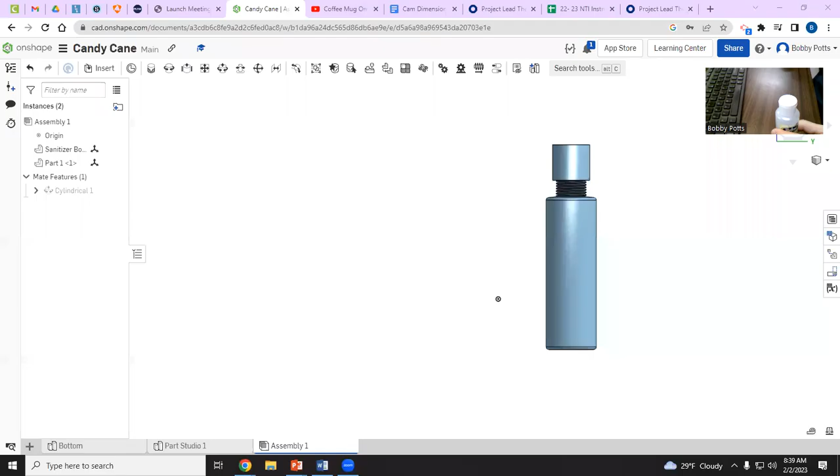But I'm going to create the bottle, top two pieces, and I need to do it somewhat quick because I've got to be under 15 minutes. So essentially, this is what we're going to make. This right here, slightly at the top here. Let me stop. Okay, slightly up, and then the bottom of it. You have a bit of a concave there, which you can't really see.

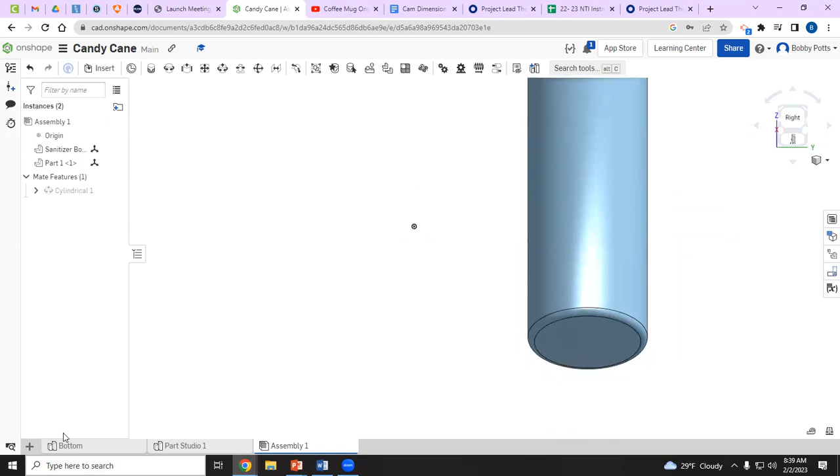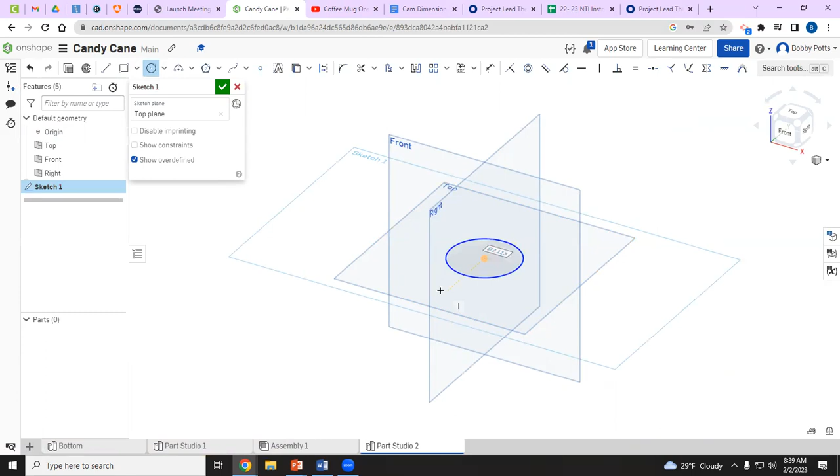So, to do this, once you try it on your own, need the video, use the video, but try and add those features, get it roughly in the correct dimension. But I'm going to create a part studio, sketch the bottom, and I'm going to start with just my cylinder. I'm going to make it 1 inch. Okay, let's extrude it. We'll make it 3 inches tall.

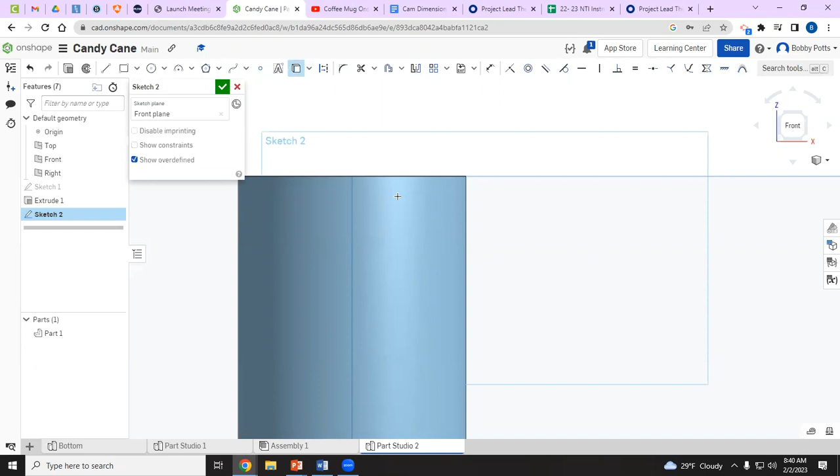Now, an important part, adding this concave, we're just going to sketch a triangle on this plane. All right, so front plane. I need to make sure I hit the use project to convert. Right now, that's the circle around the top. I want it to become a line across that plane. So project that line onto that plane.

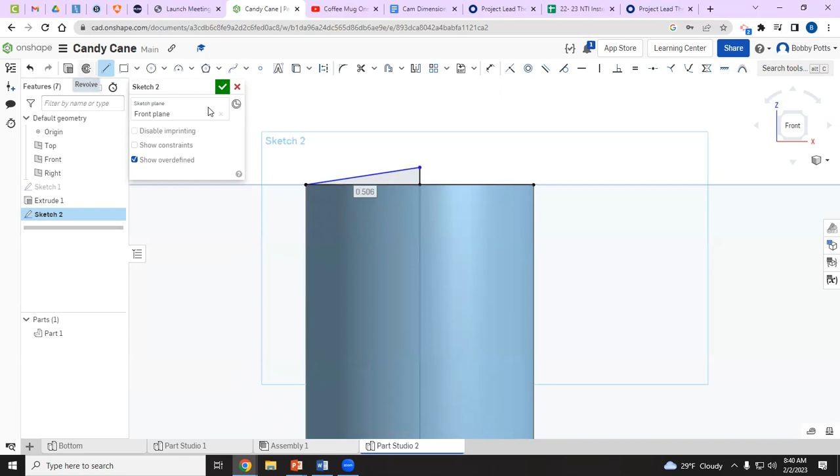All right, and now I can just build my triangle. I don't care a whole lot about dimensions. I just want to make sure I get the correct shape. Now it's filled in, so I know I can do my revolve, that triangle, that axis, and there we go. Okay, then we're gonna do kind of the same thing on the bottom.

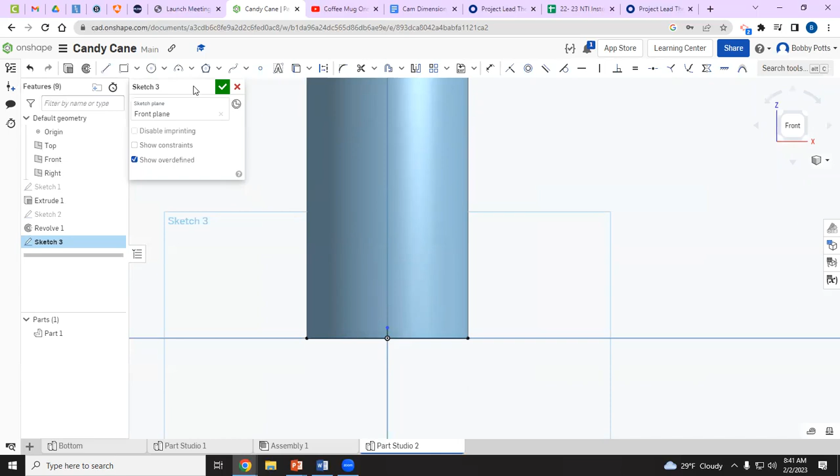So sketch, I still want the right plane or front plane. Convert that to the line. I'm gonna go up a little bit, and this time I'm gonna make it an arc from there to there, right about like that. Okay, revolve that face, axis right there, and we want to make sure we remove.

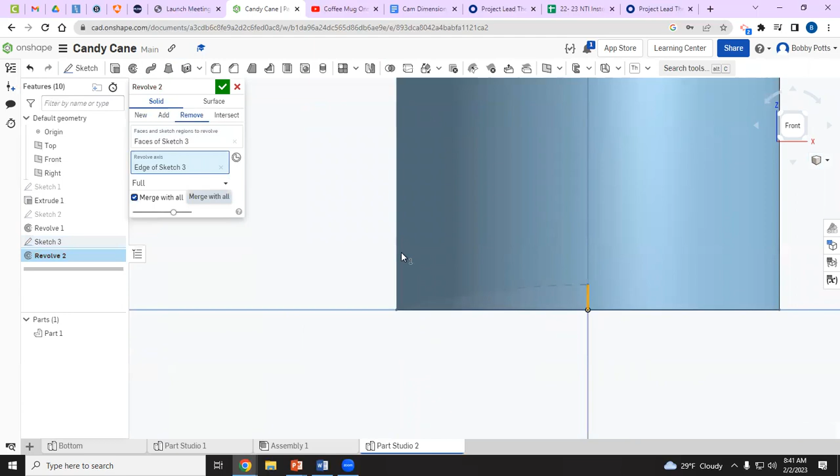Okay, if we remove, you can kind of see it there that it's cut out. Not that big a deal. All right, and then the last thing I want to do is a fillet, kind of soften up that edge and that edge. Mine set at 0.05. Looks pretty good to me.

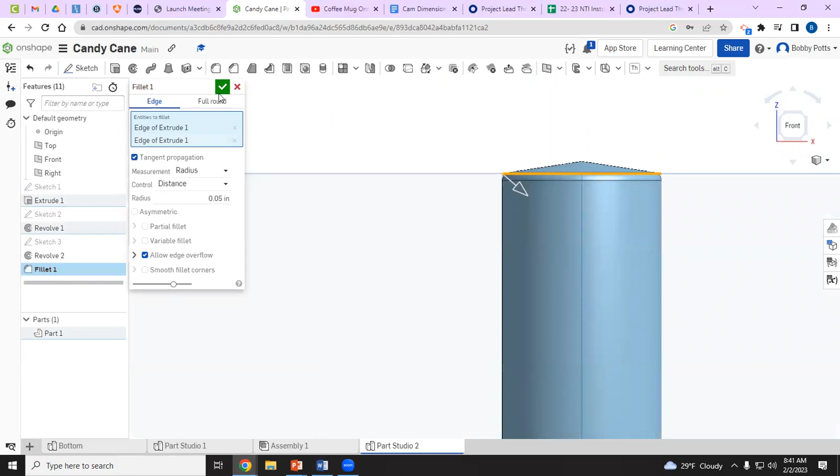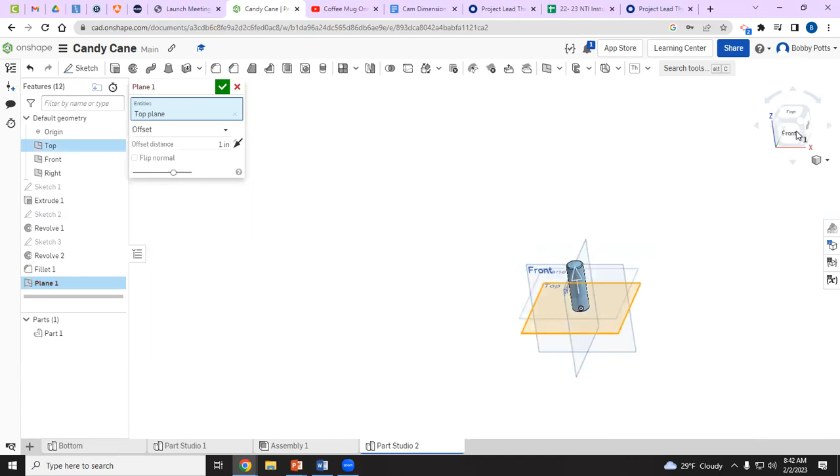Okay, now the cap part. We need that cylinder right there for it to screw onto. So I'm going to first do an offset plane. I want that top plane, and I want it to come up to here. We set that at 3 inches. So I'm going to offset it to 3 inches. So now that plane is right through here, which is where I want it. Isometric view, so I'm going to build on this plane.

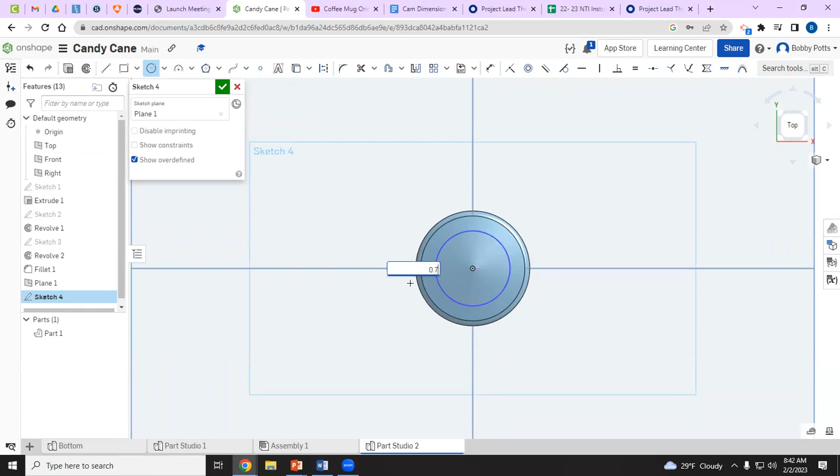So sketch that plane. I'm going to make a circle from my center. And right there, I'm at, let's go 0.7. Okay, extrude, sketch 4. Let's go up a 1/2 inch.

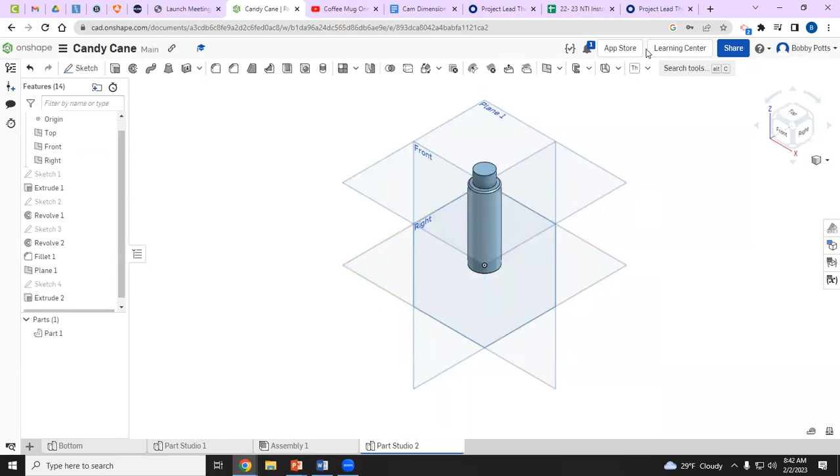So you should have your thread creator. If it's not there, hit add custom features, search thread creator. That's hopefully there. If not, click that one, and then it should pop up here. So we want our thread creator. I want it to go around this edge right here.

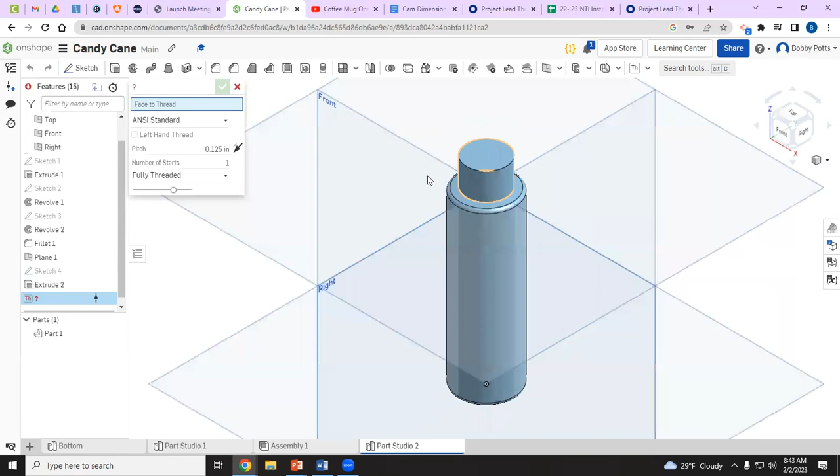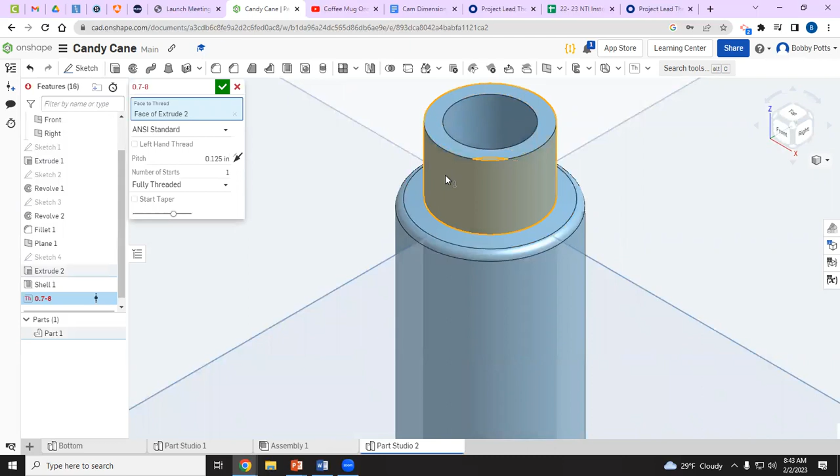Before we do that, let's go see if we can hollow it out first. Okay. Yeah, I think we have to do that before we thread it, or it'll mess our threading up. So now we want to go right there. Pretty big threads. Let's cut that down to maybe 0.1. See what that looks like. Looks good to me. So remember our top here, we made 0.7, and then it's got 0.1 threads. So I'm good with that part.

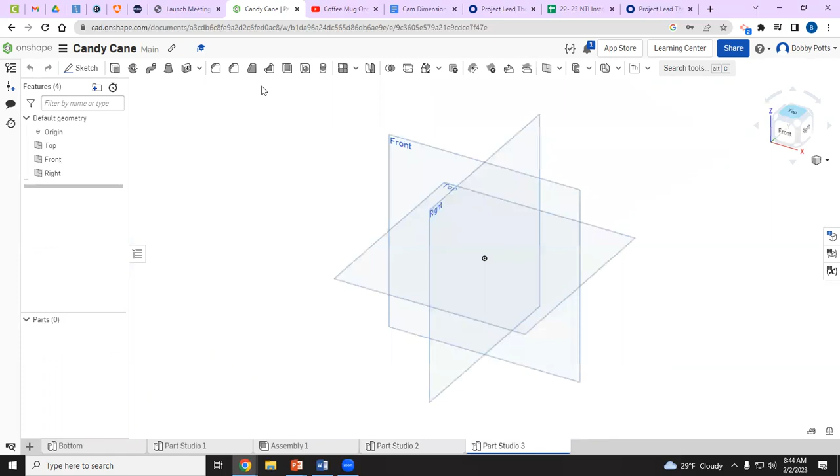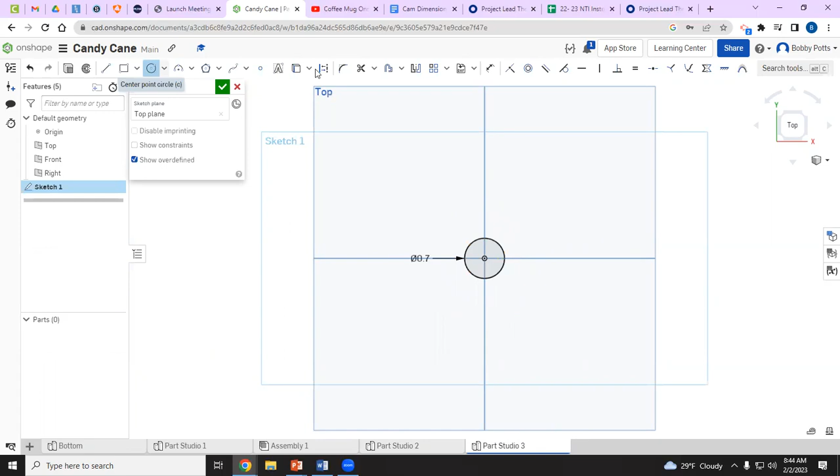Let's create a new part studio. And then the cap, I'm going to make just very simply, just do a sketch. I'm going to create the inside. I'm going to do it probably a more difficult direction, but I'm going to go 0.7, so that lines up with the part we made on the other side. And then I'm going to do an offset. Right now that's 0.13. Let's do maybe a 0.15 offset, something like that.

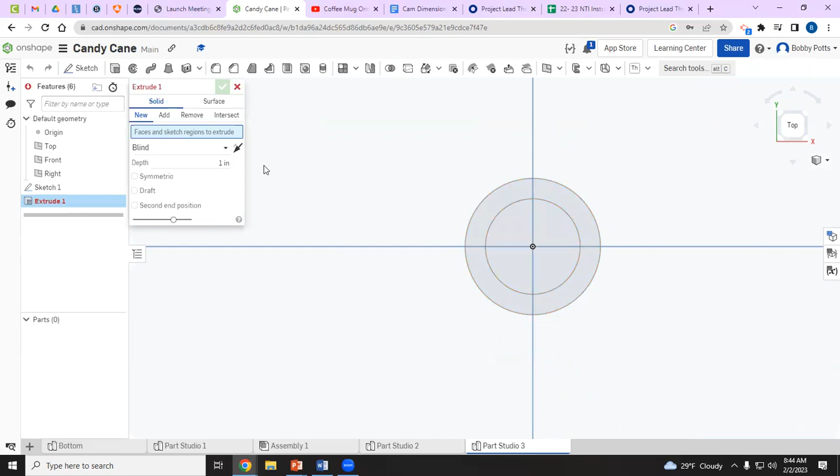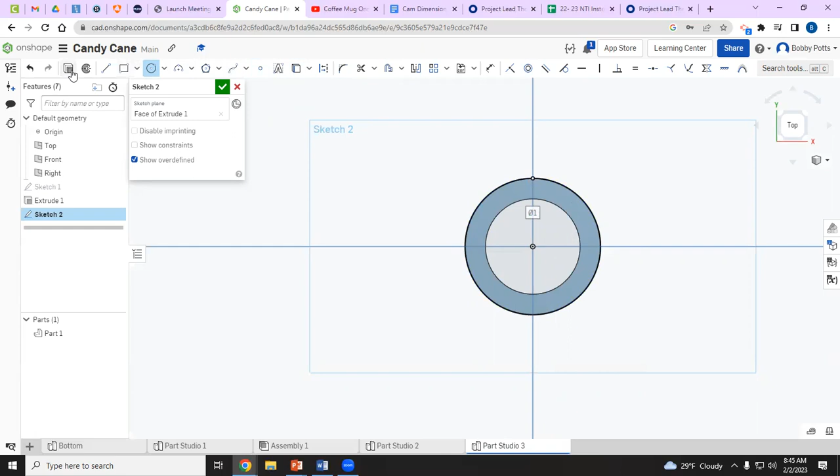Extrude, just that part. And let's go 0.5. Okay, and then I'm going to sketch on that top there. I'm going to use project. Should already be there. I'm going to do that anyway. Put a point there so I can make a circle. And now I can extrude that. We set our offset thickness at 0.15. I'm going to do the same there. All right, and now we have our cap.

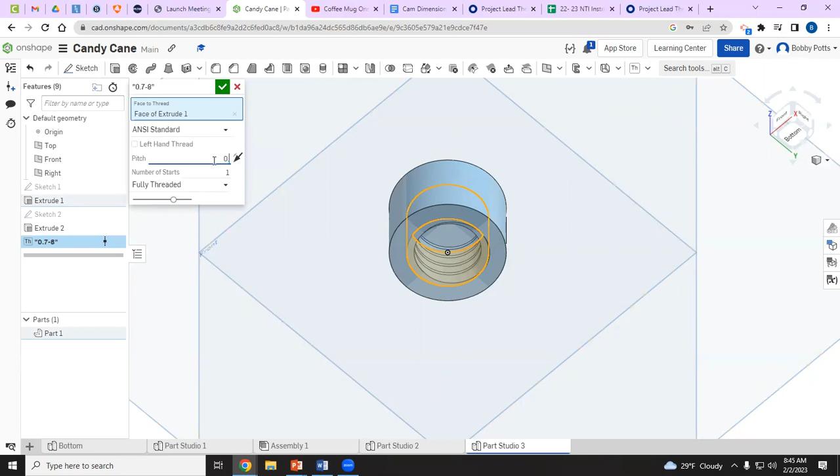Okay, but it does need to thread on the inside. So I'm gonna do my thread, select the inside there, and we change the other one to 0.1. All right, so hopefully those will line up. Let's go to our assembly. And let's insert the two parts. Okay.

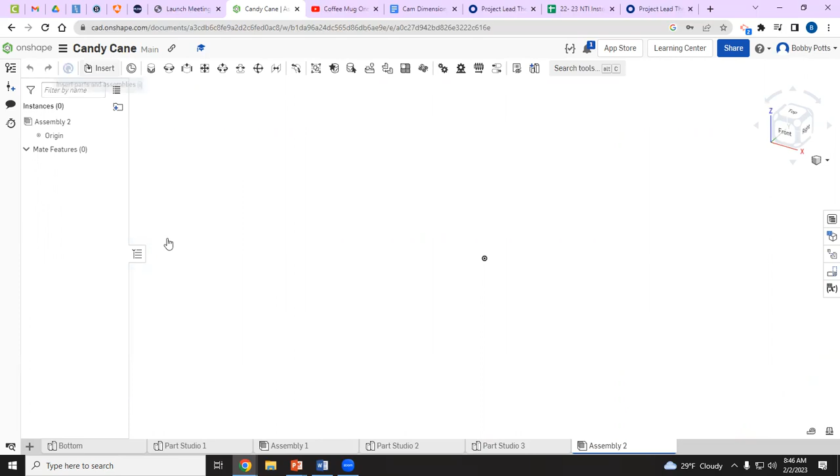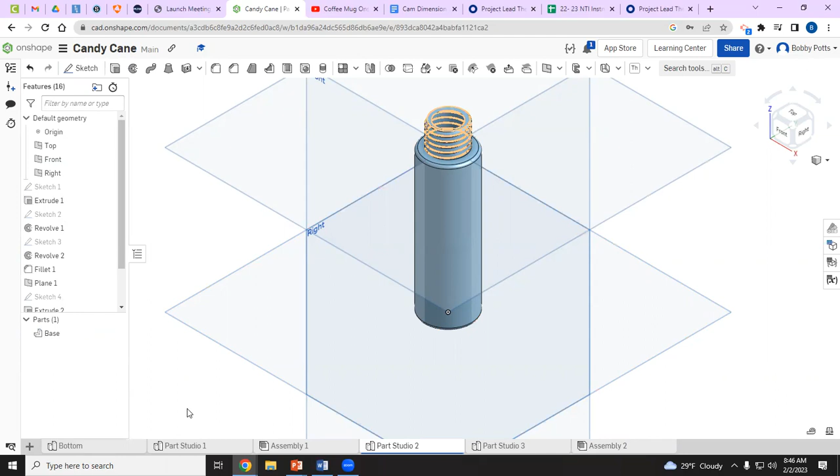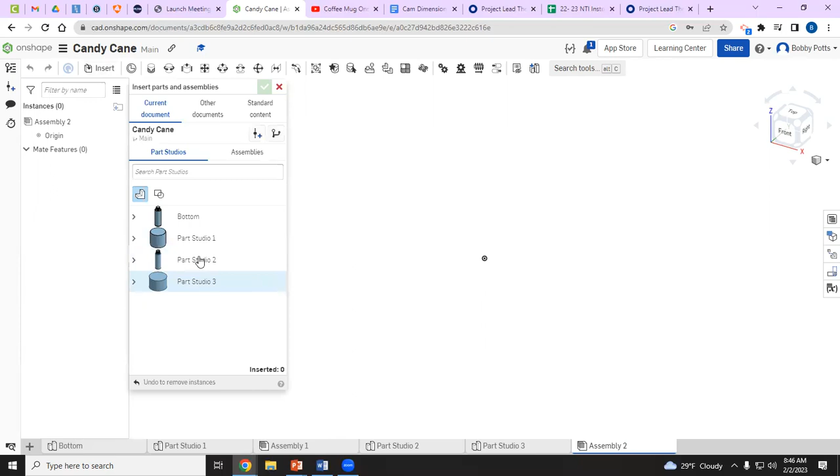I need to name those. Let's go back into these. So let's rename this part. Let's call this the base. And then name this part. I'm going to call this the cap. Okay. So now when I go into my assembly, I want to insert part studio.

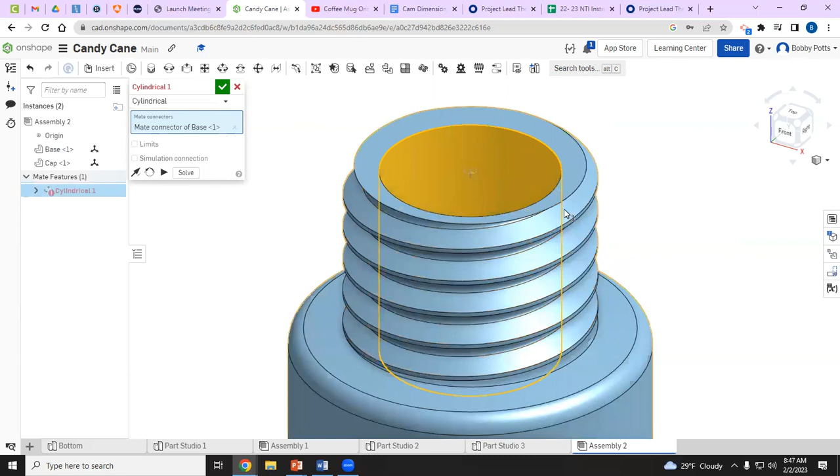Okay, so remember we have all our different types of mates. This one, cylindrical, does a revolve and it goes up and down. So if a cap is spinning on and off, it needs to do both those things. So I'm going to click that right there. That's the center and top of that circle. And I want it to mate up with the center part of my circle. So,

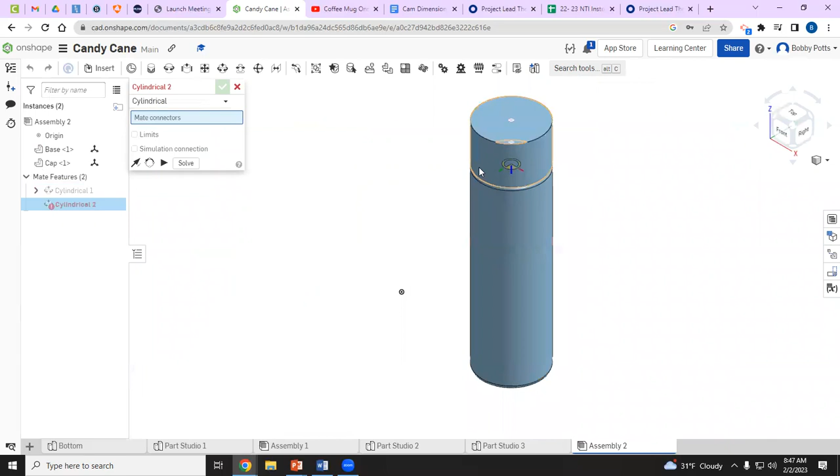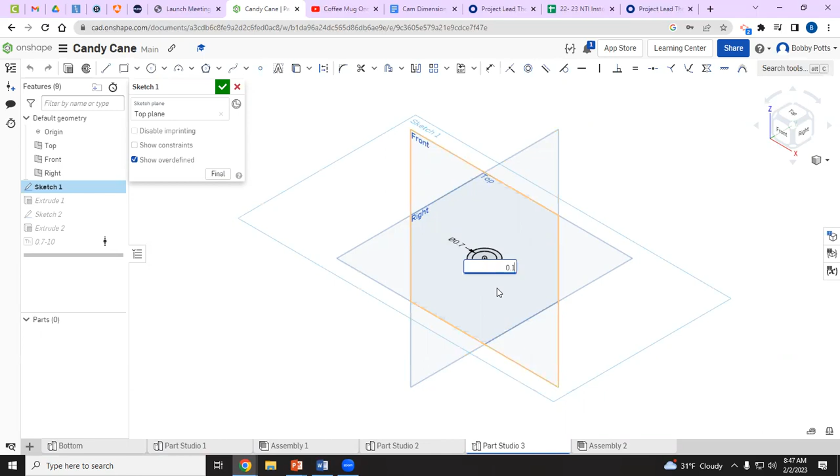I need to change our thickness there a little bit. That 0.15 may be a little bit much on that. So going back into this sketch, let's change that to 0.1. That may mess up my threading. All right, that looks all right. Raise that up a little bit. So now I can see the two different pieces threaded together.

Take a screenshot of that and submit it as your work.